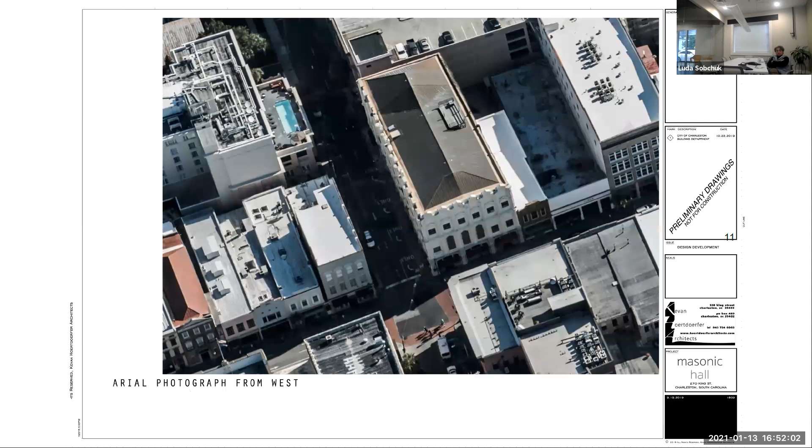Yes, okay. Kevan Hoertdoerfer, architect for the client. Lawrence, if you don't mind, just scroll through these generally until we get to the pictures. I think you've all seen this building enough to know the context and history, and there are historic photographs and the proposed elevations. It's been through the board before, and I'm assuming you've been down to the site to take a look at it in person as well.

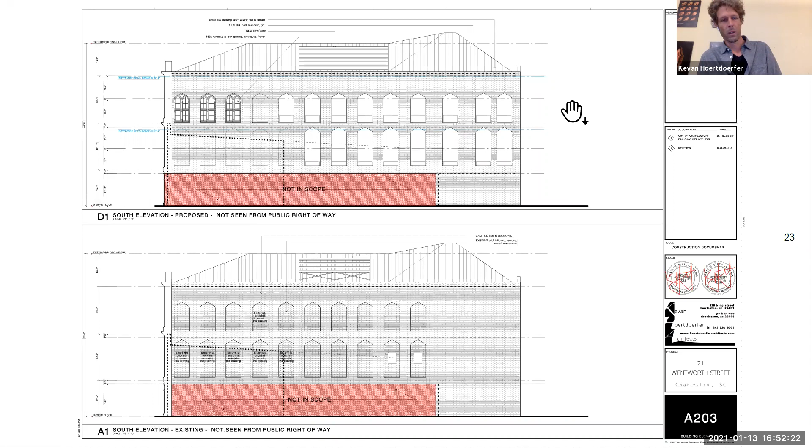What's not part of the submittal is actually pictures of the HVAC screen, because that got put up post submission. But there is—okay, you can stop there, that'd be great.

There is a plywood mock-up panel in place. Just to quickly describe that, it is slightly further towards King Street. It's no higher than what is existing. We hope to be working with staff on a screening material that is acceptable, but wanted to at least get you to view it and see it in person.

It's as compact as we can make it, and the reason it has to get pulled forward is because there's a hip condition where the roof raises higher, so we can't push it further back on the roof. We didn't want to make it wider because that would make it taller on the roof, so we ended up keeping the platform as is and extending it slightly towards King Street.

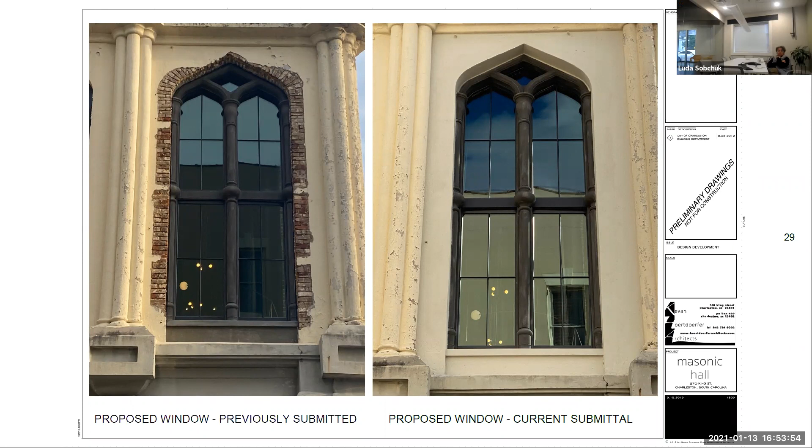And then the other piece of this is obviously the windows. The picture on the left is what was previously submitted, showing the exposed brick around the window. On the right is the finished stucco condition and how it returns back into the GFRC all around, painted with the proposed color as well in that one panel.

Next page. Just a slightly off-center view looking at both sides and how the GFRC panel sits against the stucco. The caulk joint is concealed behind that stucco. Next page.

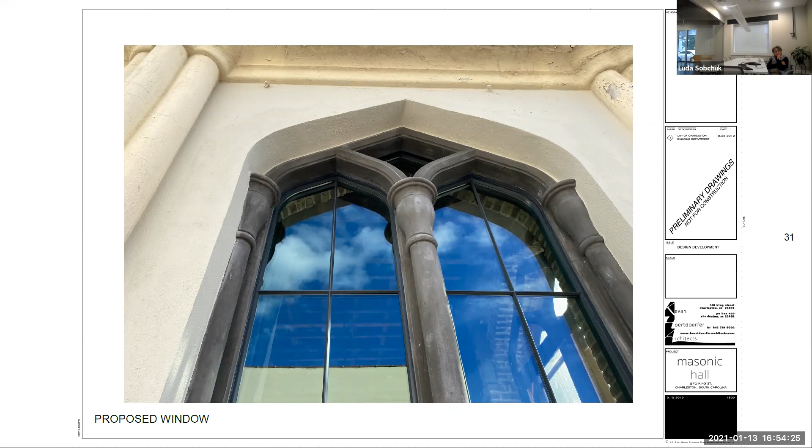Looking up—this is standing on a lift, so you're at about 25 feet floating above the sidewalk at this point, looking up a little closer in detail at how the stucco returns into the GFRC. Next page.

And then a few other close-ups. There's a little touch-up work that needs to get done on the right middle knuckle on the left image, where the stucco is not completely sanded off. But other than that, they finished it out well within the time constraints of having the lift on site.

The other item—honestly, I'm not sure if this is part of the BAR purview for this submittal—but the color of the horizontal GFRC member that sits between the windows, we are proposing to paint it the same color as the window. Because when you look at the historic photographs, what we are proposing as GFRC elements actually go from the sill up to the head condition.

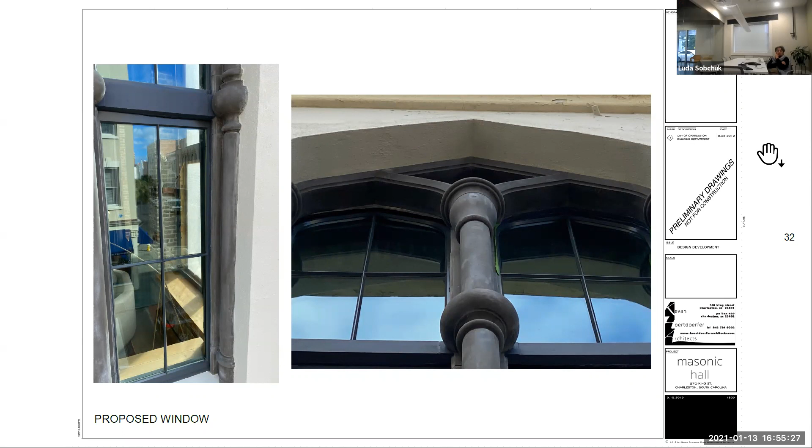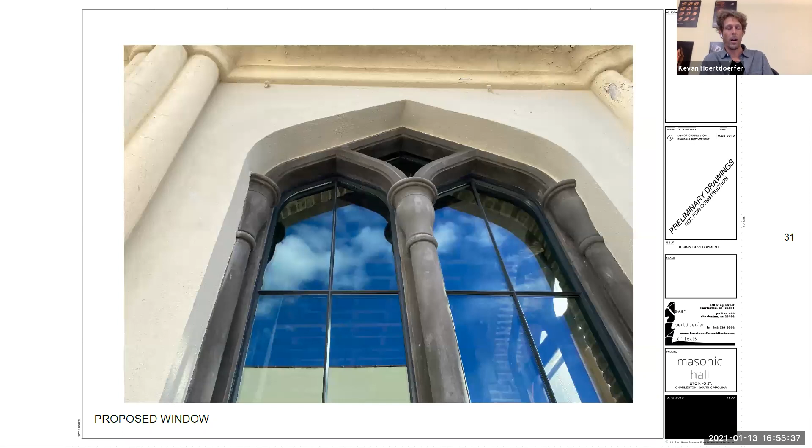You have that tracery at the top, but everything between that is window. So we wanted to honor that representation and view it as a tall vertical opening, tall columns with the GFRC, and then the window and that horizontal member would be painted the same color to create that recess behind the tracery.

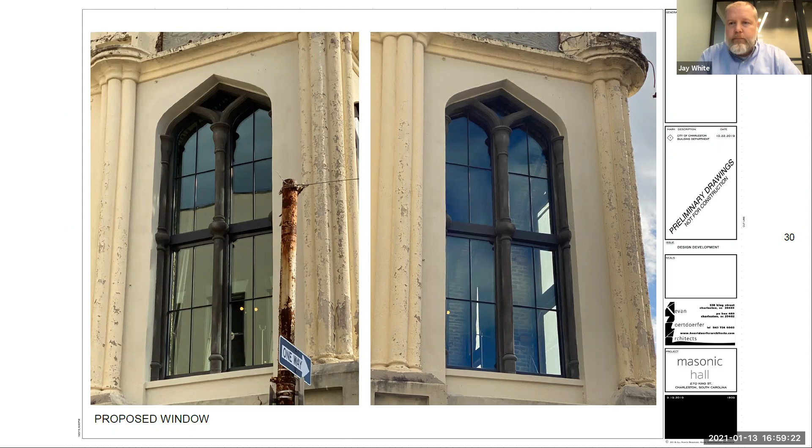This is Leon Scott. I think that looks fantastic. I think they did a really good job on the mock-up, so I'm in agreement with staff comment.

Thank you. Anyone else? I also think the work was done to a very high level, fine with the contrasting colors proposed by the applicant, and so I would support. Jay, this is James.

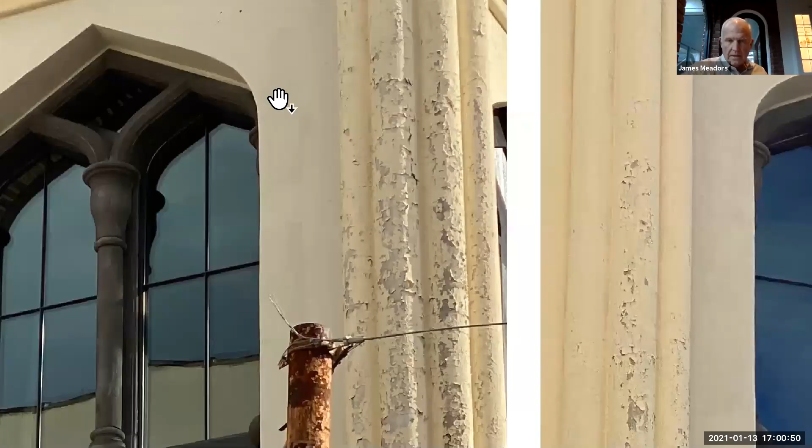Kevin, the stucco on the outside, the face of the wall, you can see where the stucco joint is made. I think a greater effort has to be put into making sure that you can't see where the old and new stucco are meeting. There's just a vertical line that tracks around the whole system. The stucco work itself looks fine. The older stucco work looks great. The window looks great. The contrasting colors to me look great. I don't know what their relationship is to the original colors, but trying to eliminate that line which marks the new stucco and the old stucco can be done. It may mean you have to go to different lifts, but you can see it. It just traces all the way around.

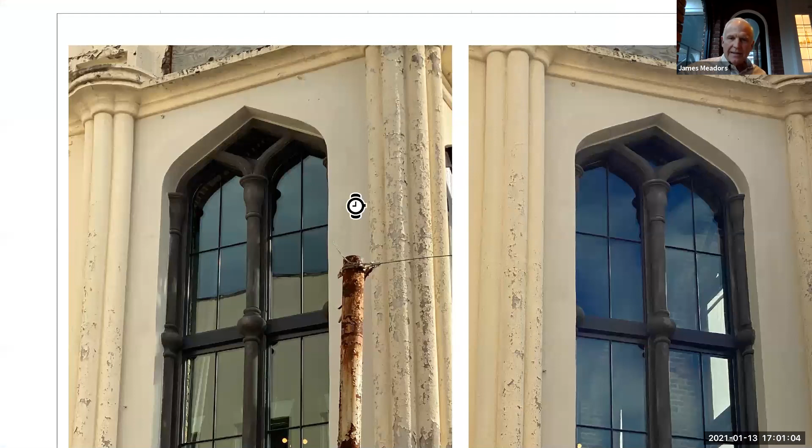Thank you. Oh, I'm sorry, Jay, and one more thing. I don't have any idea about the HVAC stand. I tried this, I didn't see it, and if it was there, I'm sorry, I just didn't see it.

This is Luda Sobchuk. I think the applicant had fulfilled the obligation, so to say, with this mock-up. It looks really good. All the maybe intricacy with connecting stucco and edges could be worked on, but other than that I think it's done well, and the color is really looking good on this building. So I will support the staff recommendation for approval.

Great, and I do as well. I think the issue of the color is that if you're going to restore the building's historic color palette, you have to do it all or none. The historic color that was on the historic windows can't be studied microscopically because those windows are gone. But this color is completely appropriate in a general sense, and I think the outcome is actually much better than I suspected. I've always been sort of suspicious of GFRC, but this seems to be a good installation. So I agree with staff's recommendation, and I agree with the board comments.

Is there a motion? Jay, I'd move for approval of the mock-up with staff and board comments. And I'm comfortable with the screening being decided at the staff level, unless staff can't work that out and it needs to come back to the board.

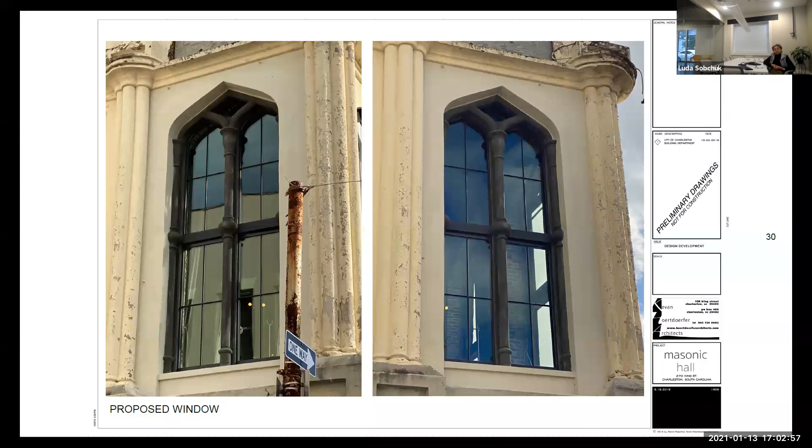Okay, so what I've got is a motion for approval of the mock-up with staff and board comments, HVAC screening to be reviewed by staff. Correct, right. This is Luda Sobchuk, I will second that.

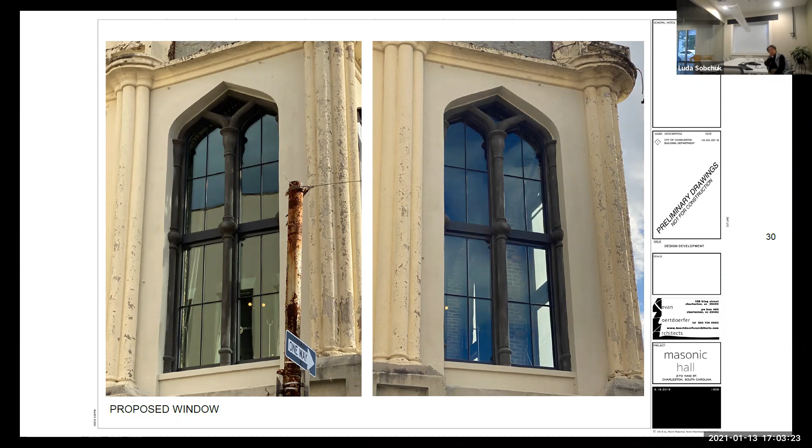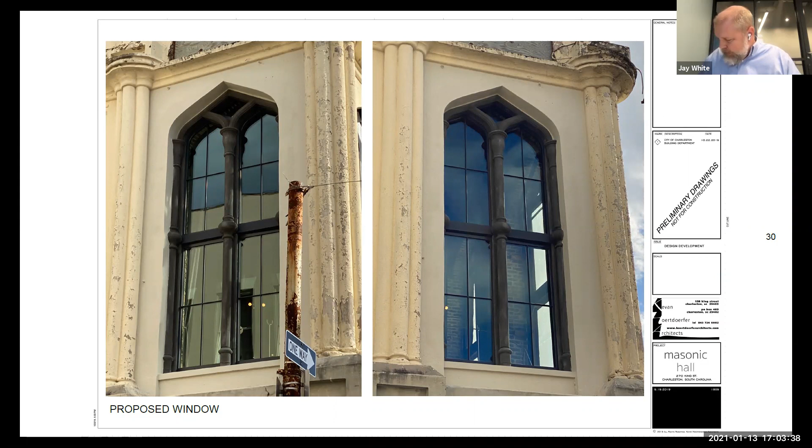Okay, so we have a motion made and seconded. Mr. Scott, how do you vote? Yay in favor. Mr. Robinson? Yay in favor. Ms. Sobchuk? Yay in favor. Mr. Meadors? Yay in favor. And I vote likewise. The motion passes 5-0.

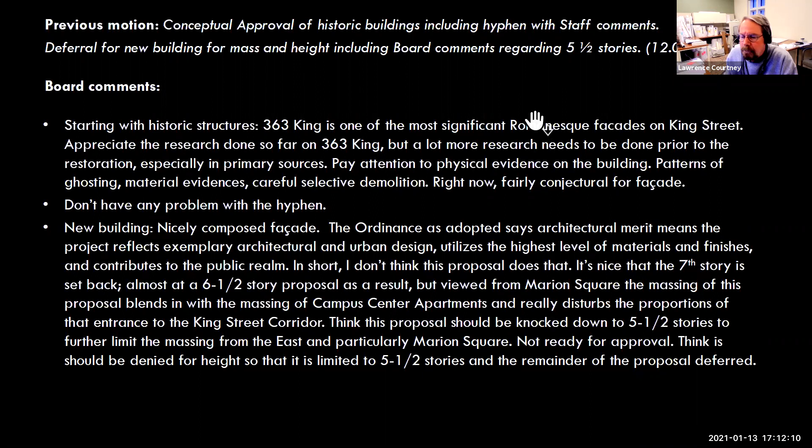They thought that this proposal should be knocked down to 5 1/2 stories to further limit the massing from the east, and particularly Marion Square. Not ready for approval. They thought that it should be denied for heights so that it is limited to 5 1/2 stories, and the remainder of the proposal be deferred.

Other board member noted historic structures, further research on materials for columns on 363 King is needed, but on the right path. Okay with hyphen, could be more glassy and contemporary. New building, they would echo prior board comments.

Visibility is okay if done right. Looks really heavy and imposing. Penthouse is nicely designed with good materials, but disassociates itself from the main structure. Should be limited to 5 1/2 stories, and more studies should be done of massing. It's just not ready yet.

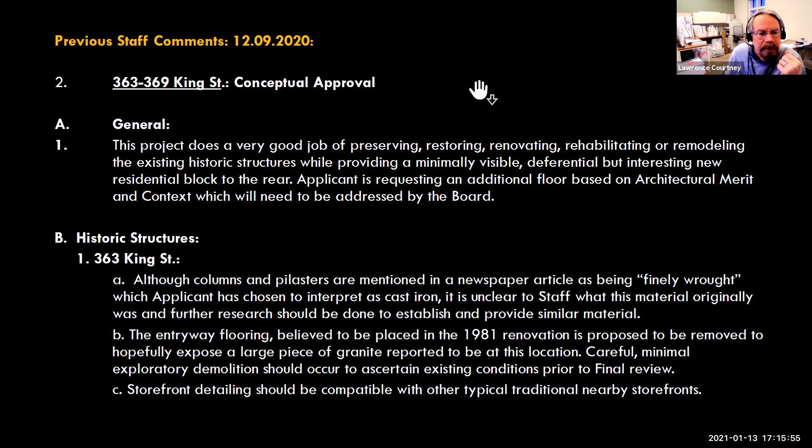Applicant is requesting an additional floor based on architectural merit and context, which will need to be addressed by the board. There are comments related to the historic structures which are not pertinent at this time, so I will be skipping those.

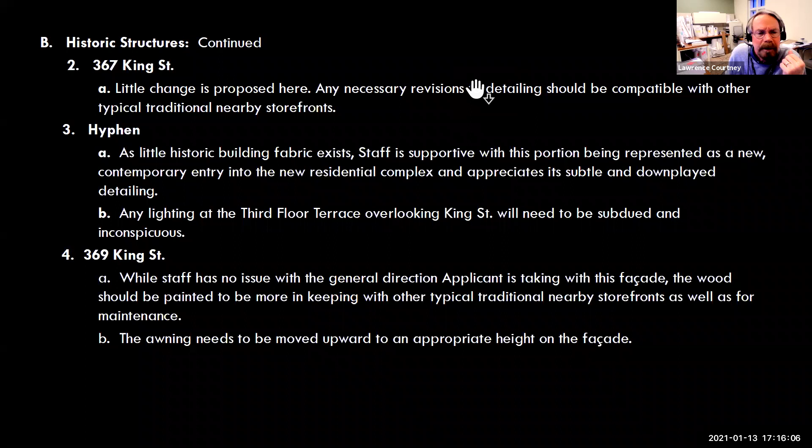The new residential block. The front of this portion of the building is a minimum of 50 feet from the building facades on King Street, and applicant has gone to lengths to ensure that it will have little, if any, impact on King Street.

While portions of this front facade will only be seen in very small parts from King Street, the facade is well composed, with the top 2 floors having well articulated, recessed, and well spaced stacked windows separated by spandrel panels over the unseen bottom floors with simple punched openings. Care needs to be taken in the detailing of these spandrel panels to avoid how they now read on drawings as heavy lines.

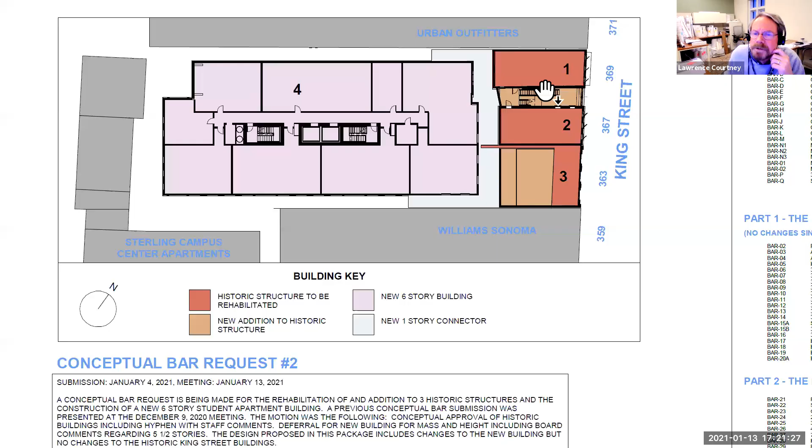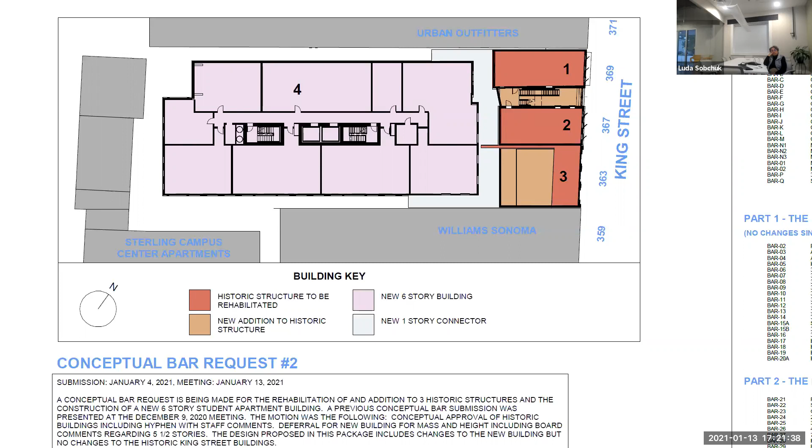Yes, great. The good news is I'm going to be very quick in my presentation, and we did what we were asked to do by the board last time. We presented a 6.5-story building, and we were told that 5.5 was more appropriate, and that's what we've done. We've removed the floor from the building.

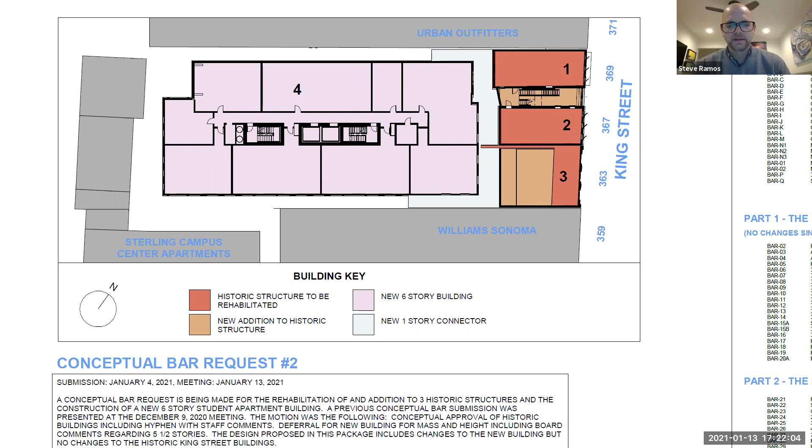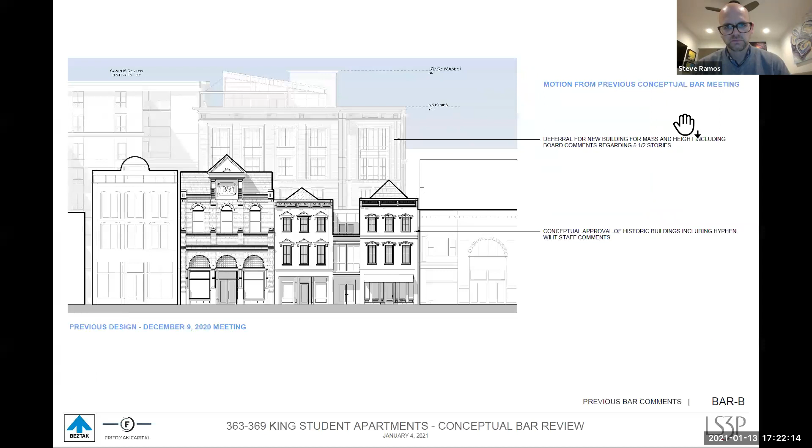This is an image of the previous design, and if you go to the next slide, you can see the old elevation on the left at 6.5 stories, and the new elevation on the right at 5.5 stories. In addition to the change in height, we have also continued to refine the architecture.

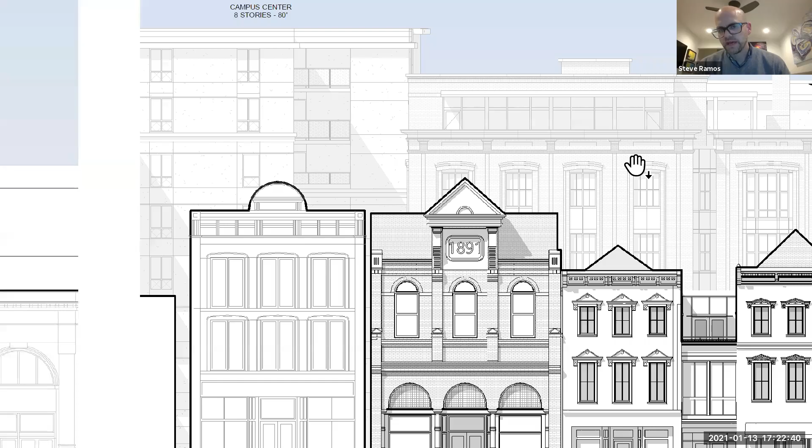We moved away from a shed roof at the top of the building to a flat roof. We've also taken the architectural language from the top of the building and pulled it down all the way to the ground.

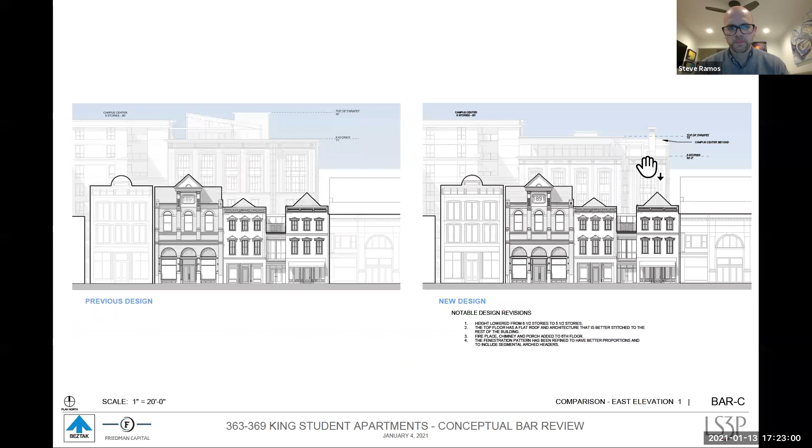This is where you can see it the most. On the left we have the previous design, and on the right the new design. Again, we've removed a story from the building, and we have flattened out the roof.

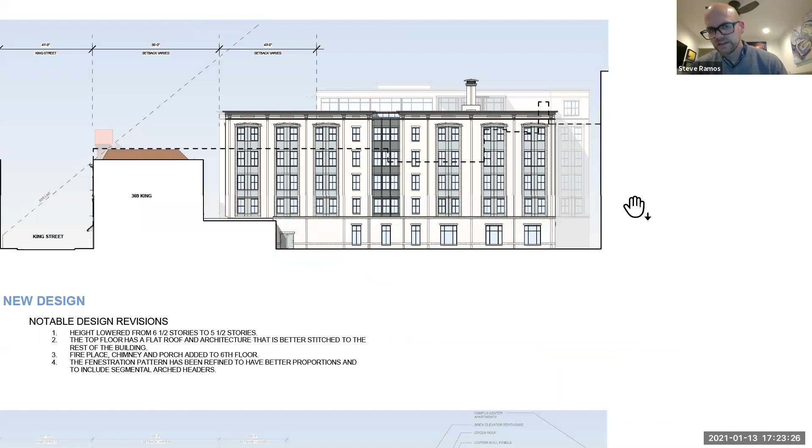I think it was Ms. Subcheck that commented the building felt a little heavy last time. So we've tweaked the proportions of the window openings and the fenestration pattern, just to make it a little skinnier and a little more elegant than the previous design.

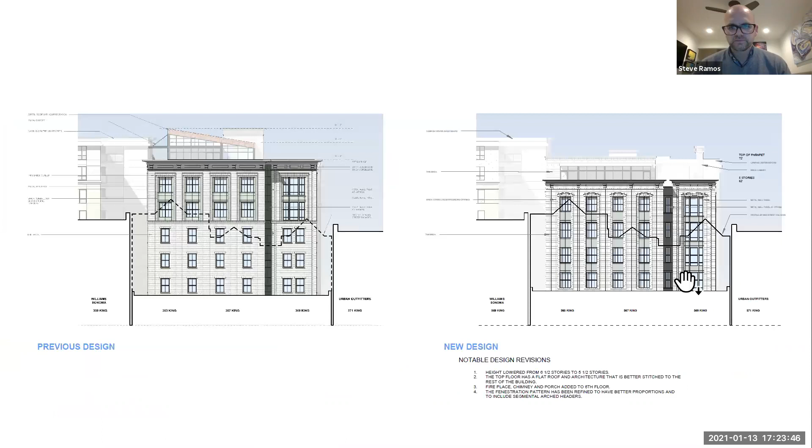This is the north elevation, and my comments will be the same. Again, we've removed the floor from the building. We've taken the architecture developed at the top of the building and simply extended it down the facade, making a really nice, balanced and elegant facade.

There is a feature on the roof that you see on the right. There's an actual fireplace that's going to be on the 6th floor rooftop terrace, with an actual chimney there, which provides a nice amenity for the building and an attractive feature to the architecture as well.

Not only have we reduced the height of the building, you can see we've actually pushed the top floor back a little further than the previous design. So we're doing everything we can to minimize the visibility of the building.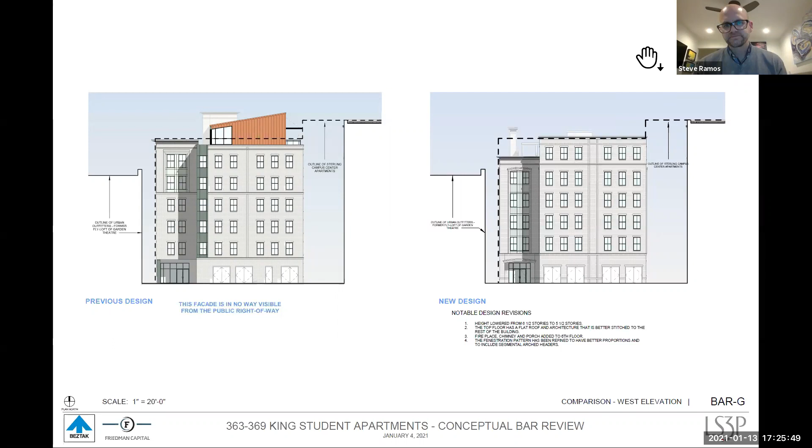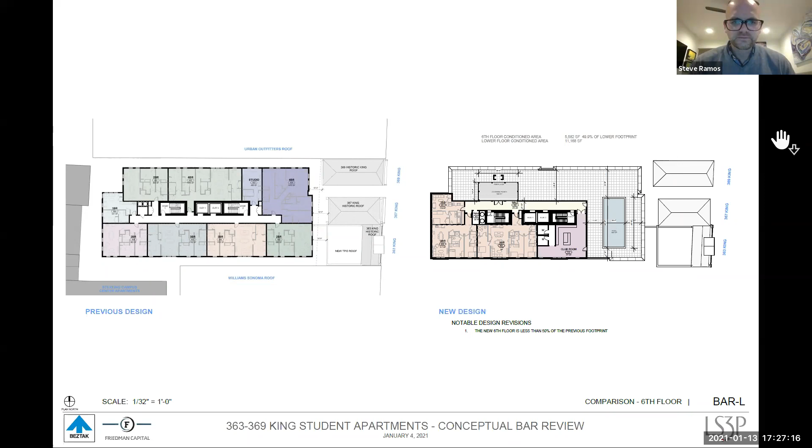We do have a covered porch on the north side, where the cursor is. And you can also see where that fireplace and chimney is located.

So this is our rooftop plan. Previously, this would have been the 7th floor plan. So you have the old 7th floor on the left, and now the 7th floor is the roof. I do not think we will need mechanical screening for this project. The preliminary mechanical plan, we were able to get everything in the southwest corner of the site. However, those things tend to evolve, so we will continue to study that to make sure mechanical equipment is not visible.

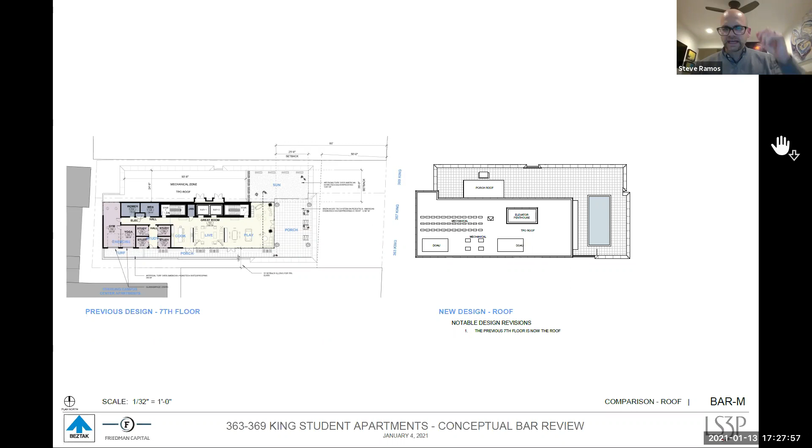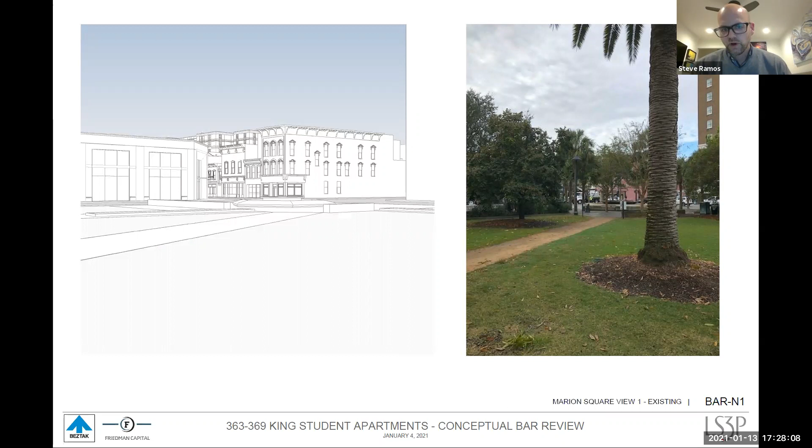This is a series of 3D images. This is the existing condition on the left. You can see what would be visible without trees. And the next slide, you can see the new building that has been added.

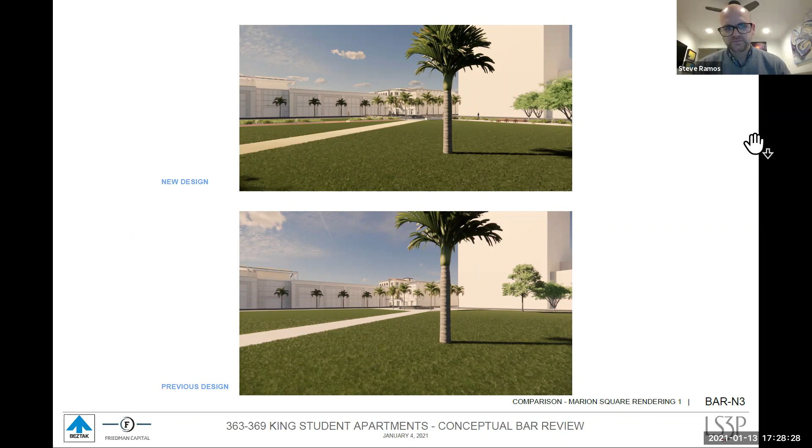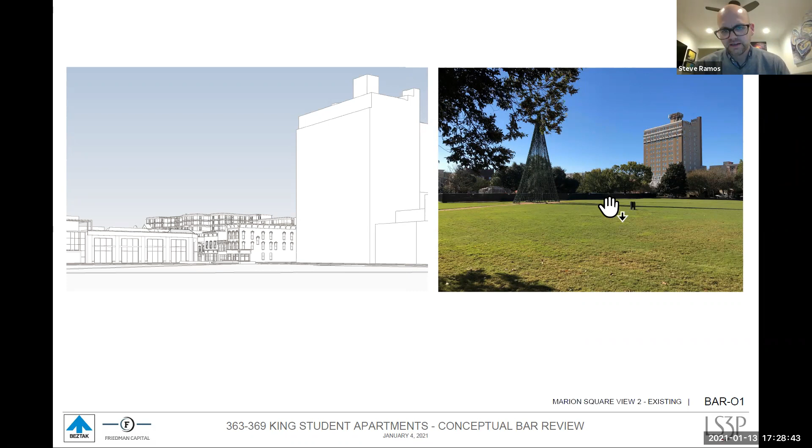This is from far away in Marion Square. On the left, you can see the existing Campus Center Apartments building. And then you can see our building that gets built in front, which from this vantage point is actually lower than the Campus Center building.

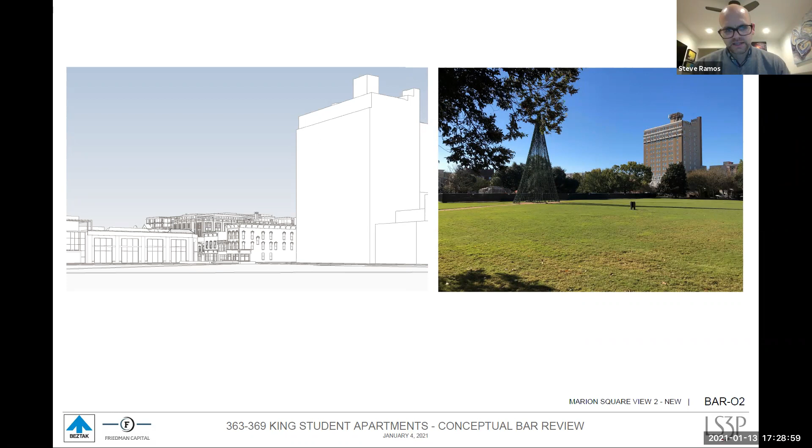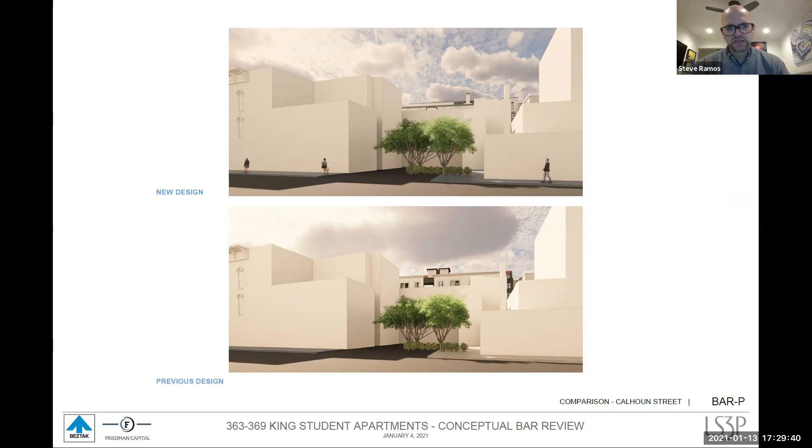Issues regarding height, scale, and mass have been addressed by lowering the building by 1 full story. We've positioned the top floor in the southwest corner to make the building as minimally visible as possible. We also pushed the elevators back to get them as far away from the facade as possible.

I think the architectural direction has improved as well. I think it's a building that is appropriately detailed, has nice proportions and window patterns. So we're really happy with where we're at. And with that, I kindly ask you for conceptual approval of the project. Thank you.

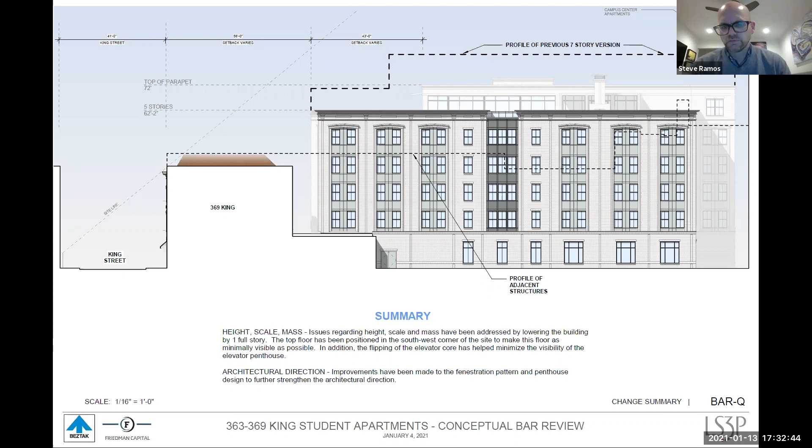The drawing that shows it best would be the east elevation. So if you want to go backwards a bunch of slides to the east elevation.

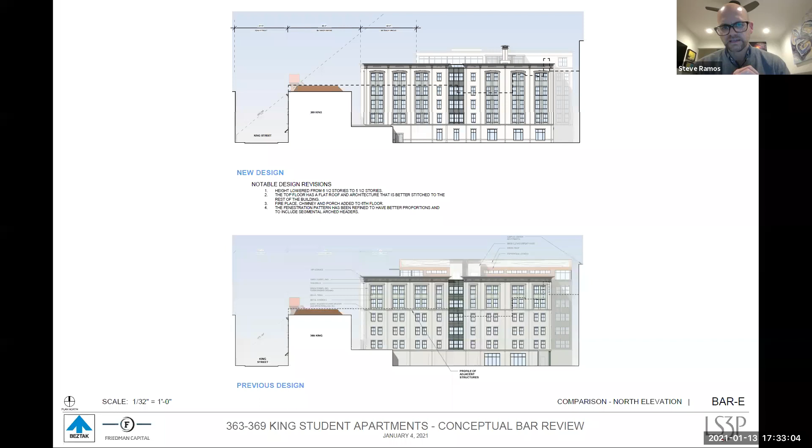So this is the north. If you go back another slide. So this exhibit here has those dimensions to it. I think this is where I got them.

And Lawrence, could you zoom into those numbers?

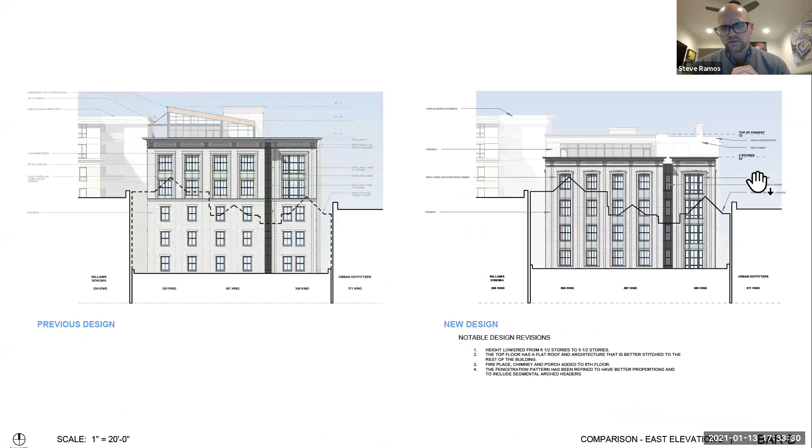And just so I'm clear, yeah, so that's 5 stories that says 62 feet. You know, that's a parapet. The actual floor plate is 3.5 feet below that parapet. So the actual 5th floor that you stand on would be at 58 foot 6 inches. So the parapet creates effectively a railing at that floor.

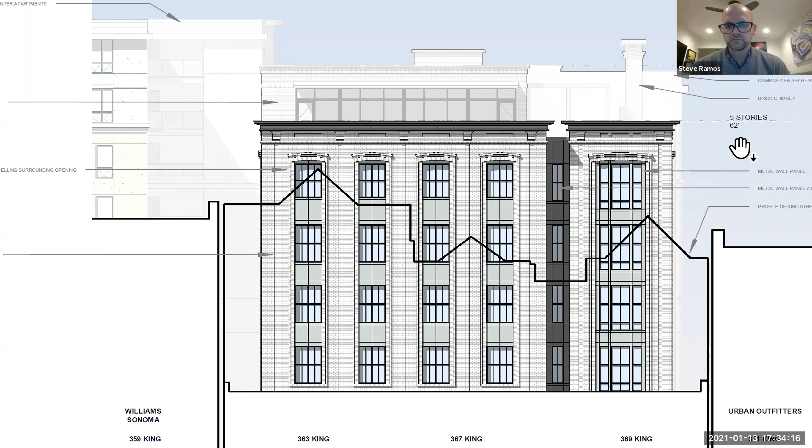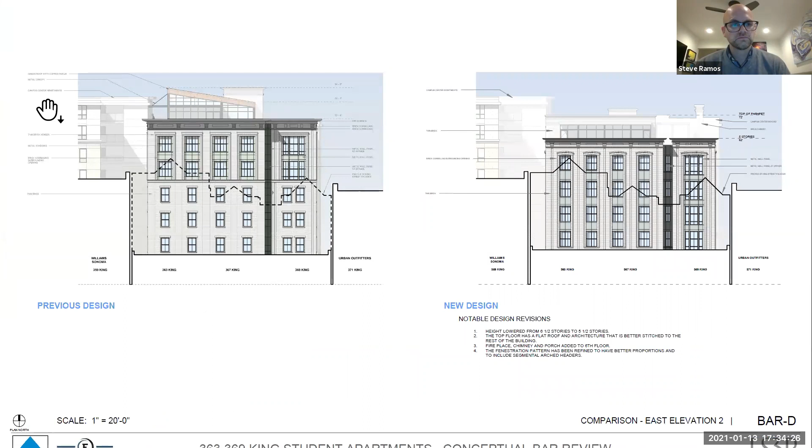Okay, any other questions of the applicant? All right, hearing none, let's go on to public comments.

Jay, our first speaker is Erin Minigan with the Preservation Society. Thank you, Erin Minigan with the Preservation Society of Charleston.

First, we want to commend the board on their approach to this project at the previous review. The Preservation Society voiced significant concerns about the visibility of the height of the building, given its sensitive location close to King Street and Marion Square, and strongly encouraged the board to exercise their authority to reduce the building by a story. We were very pleased the board agreed and elected to reduce required height, and feel this was the most appropriate decision given the proximity of this project to Charleston's most important historic commercial corridor. Again, we thank the board for their leadership in this case, which we feel has put the project on the right path and presents a positive example of how the design review process results in better, more contextual new development.

Next, we would like to thank the architect who has consistently met with our team and responded to our feedback, and we feel has taken the board's direction well. The revised design is much more appropriately scaled for the site and presents significant architectural improvements. Specifically, we feel the new fenestration pattern and separation of the northern bay mass with a hyphen is more reflective of Charleston's architectural character. Though the historic buildings did receive conceptual approval at the previous review, we would reiterate our concerns with the hyphen element and encourage softening the contemporary design. Being right up on King Street and directly adjacent to two historic buildings, we feel it reads a bit severe and would encourage studying incorporating more traditional forms and materials. Thank you.

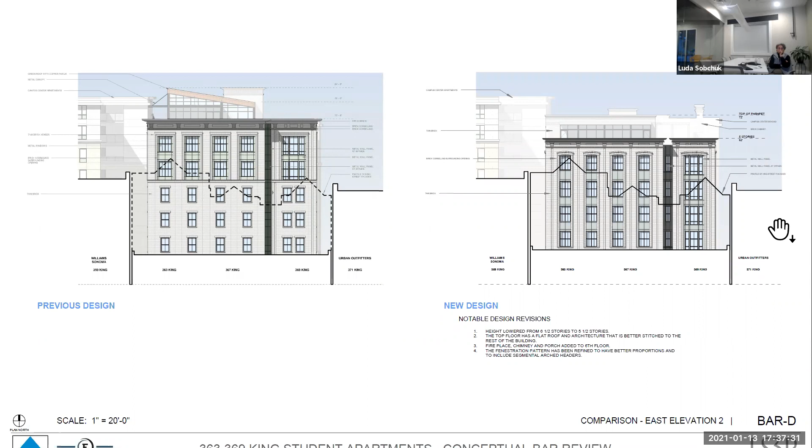Okay, I think that's it for public comment, is it not? That's it for public comment, Jay. Okay, staff comments and recommendation.

The applicant is requesting conceptual approval for a new rear student housing building block. Conceptual approval was given for work related to the historic structures and the hyphen on the 9th of December of last year, with staff and board comments.

Staff comments at this time are: the building has been lowered to 5.5 stories per board motion with a flat roof penthouse, and the overall building exterior is better articulated. It's noted again that the cornice is shown as GFRP, which staff believes to be appropriate for this location.